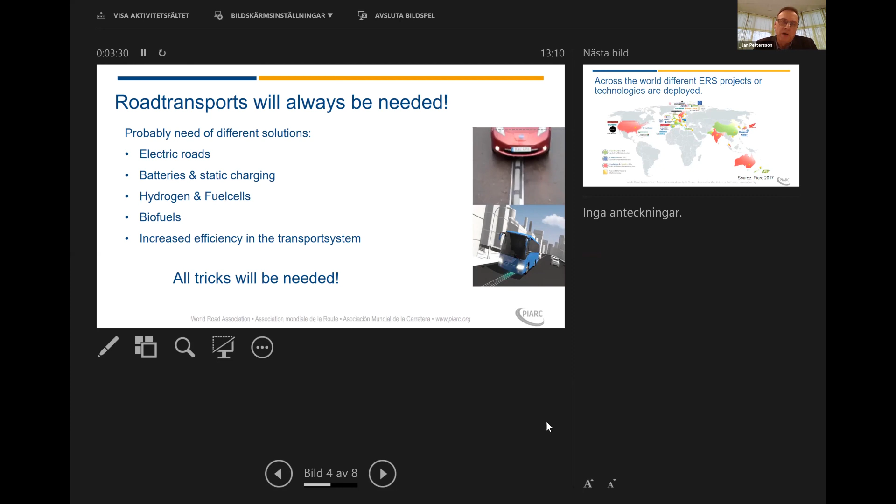We also need to work on increasing the efficiency within the transport system. Can we reduce the transport? Can we reduce the transport of goods? Can we also move goods from the road system to the rail system and to the maritime system and so on? We think all tricks will be needed to reach the goal by 2050, according to the Paris Agreement.

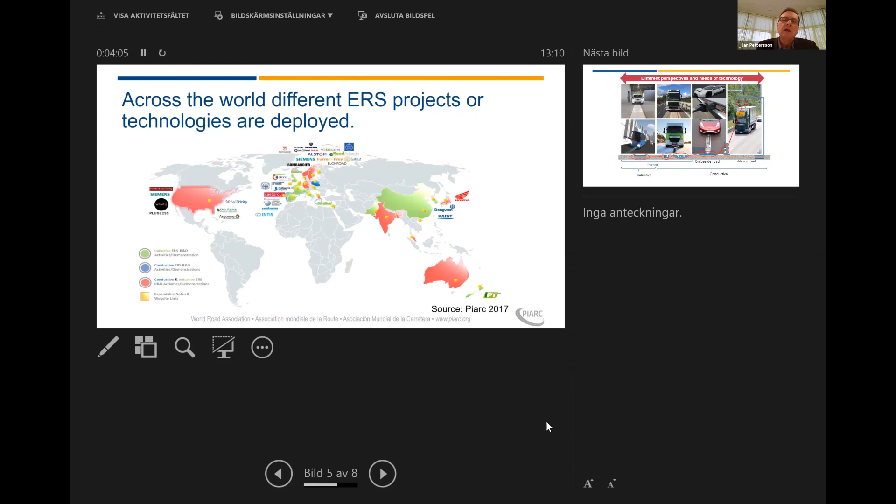So we are here today to talk about electrified road systems, and we know there is a big interest regarding this topic. The webinar today shows that too. This is a map from the previous report that we performed within PIARC from 2017 that shows the countries that are working with ERS road systems. Of course, if we should update this map today, we would probably have a number of more countries with bright colors. As I said, we will hear examples from different kinds of technologies today.

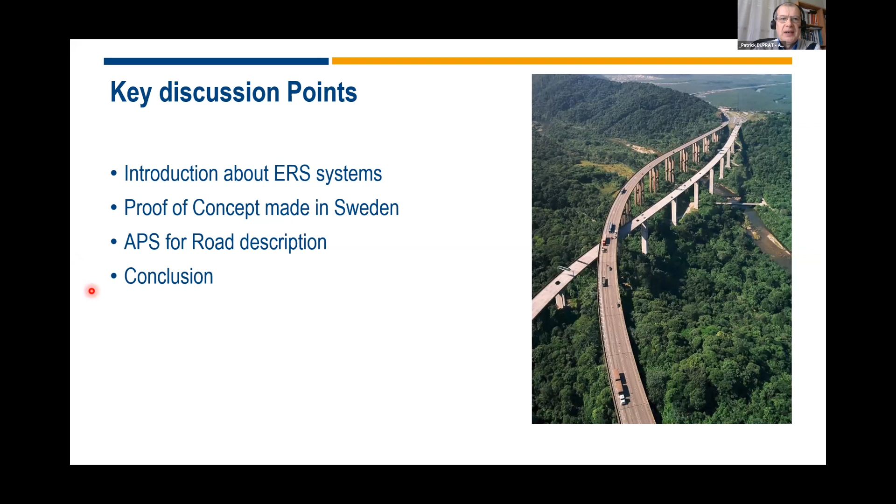So in this presentation, I will first introduce the different ERS solutions. Then I will show you a proof of concept we have done in Sweden. After, I will detail our APS for road solutions we are developing in Alstom, and I will conclude.

So, as Jan said, we have three categories of ERS solutions. The conductive one, via overhead catenary lines, where the current is collected via pantograph located on the roof of the vehicle. The conductive solutions via ground-based power rail, where the current is collected via a pickup installed underneath the vehicles. And the inductive solutions using coils integrated in the roadway, where the power is collected by receiver plates located underneath the vehicle.

If you look at the pros and cons of each group of solutions, the advantages of the catenary system are that it does not impact the roadway, and it provides an efficient power transfer. But it has some cons, like high visual impact, the fact it is usable only by heavy-duty trucks, and it creates obstacles over and alongside the road.

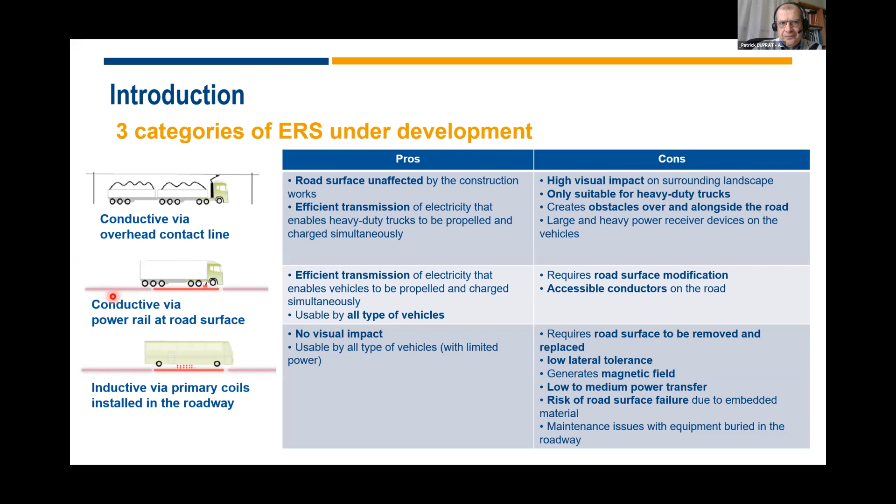In addition, Alstom is a world leader in ground-based power supply systems, with the following solutions under development or already in service, proven, on which we have already demonstrated the safety and efficiency of this type of solution.

We have developed dynamic feeding systems like the APS for tramway, in operation for almost 20 years, with more than 50 million kilometers run with this system. It is this system we are developing now for road applications.

But we are also developing stationary recharging systems, again for tramway. For instance, in Nice, the supercapacitors on the roof of the tramway are recharged at stops in a few seconds, with a power transfer up to 1.2 megawatts. We are also developing the same technology for buses, where we will be able to recharge with a power transfer up to 800 kilowatts.

It is for our experience and capabilities that Volvo Trucks asked us in 2011 to participate in a research and development project on dynamic charging. The objective was to demonstrate the feasibility and efficiency of ground-based conductive power supplies for heavy-duty trucks.

In 2012, we built a test track at Volvo Test Center using our APS technology, and Volvo Trucks developed the onboard parts. All the tests planned on this project have been passed successfully.

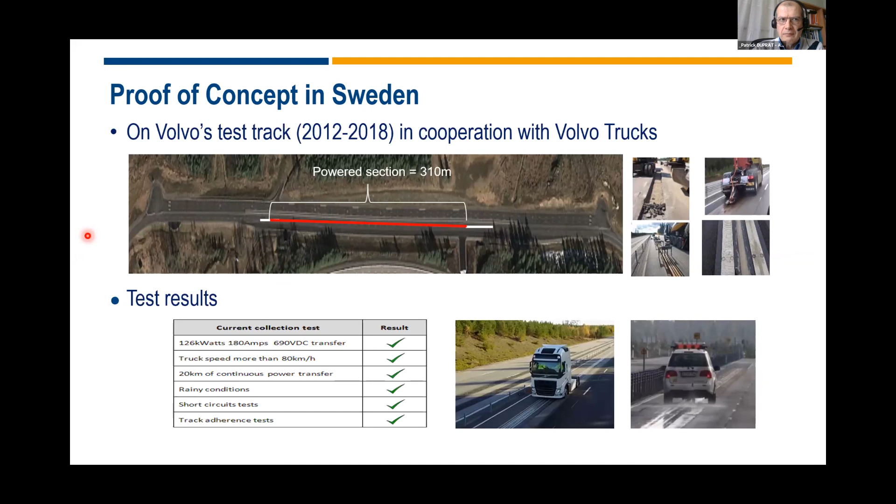On this project, Volvo Trucks also demonstrated the integration feasibility of ERS prototypes at component level on a normal size structure, although it was a hybrid truck with two powertrains.

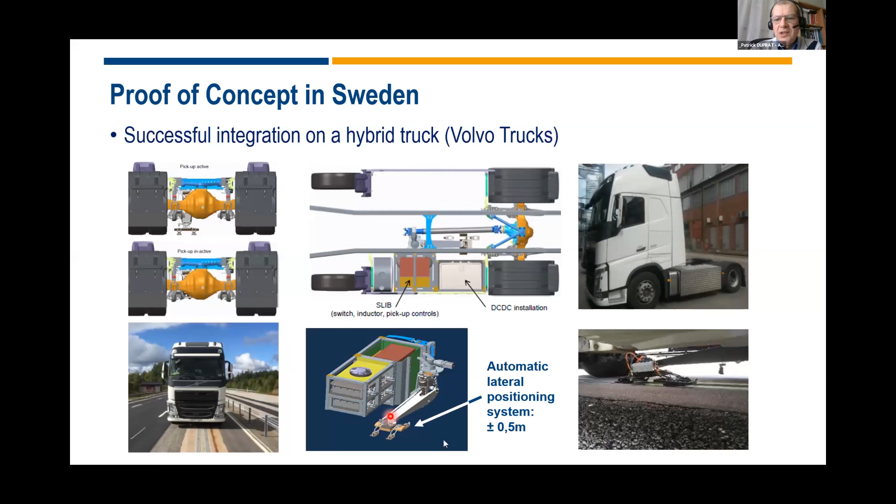You can see the current collector device installed in the middle of the tractor, which was equipped with a lateral positioning system able to move plus or minus half a meter from the center with an accuracy of 1.5 centimeters.

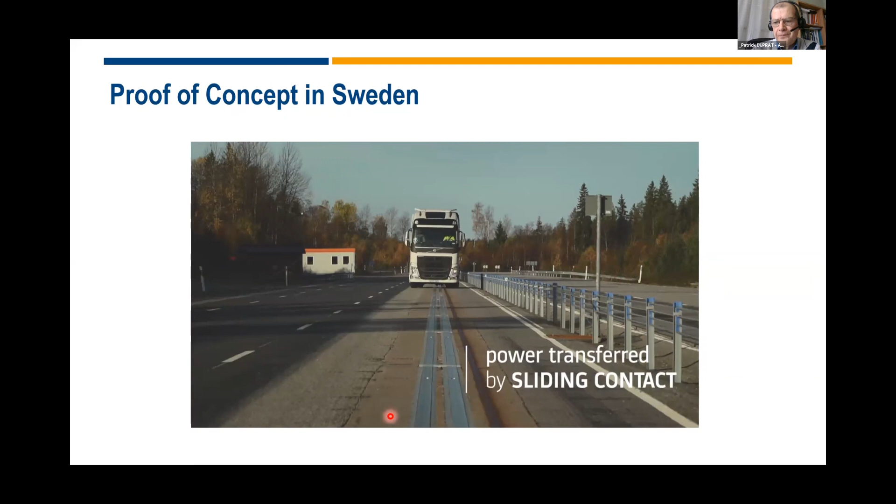Since this proof of concept, we have developed the APS for road system for road applications. New components like the ERS feeding track have been developed to fully answer road needs.

It will be installed in the axis of the slow lane with the conductor segment on the surface. You can see here in red one of the power supply segments. It is energized only when the current collector shoes in operation are arriving on it, and it will be de-energized as soon as the current collector shoes leave it.

As you can see, a part of the power supply segment, 11 meters long, can be energized outside the vehicle. This could be dangerous, even if the probability of having a pedestrian on the highway is very low. So for safety reasons, this segment will be energized only if the vehicle is driving over a minimum speed limit, which we have fixed at this time at 30 kph, and if there is no obstacle in front of the truck. It could be detected either by the driver or by smart sensors installed in the vehicle.

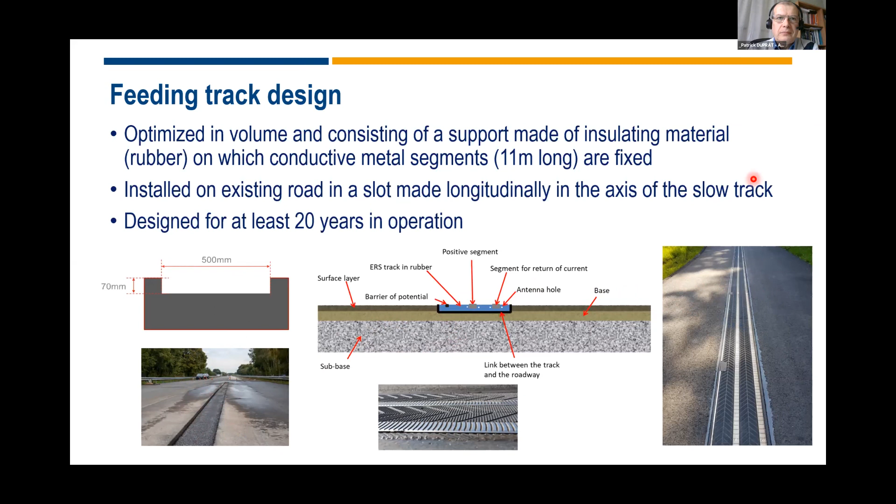Here on the right, you can see a test track made with this solution. The robustness has been demonstrated, and a lot of tests have been carried out to select, then validate, a good solution. All the tests have been carried out by the Université Gustave Eiffel in France, previously called IFSTTAR.

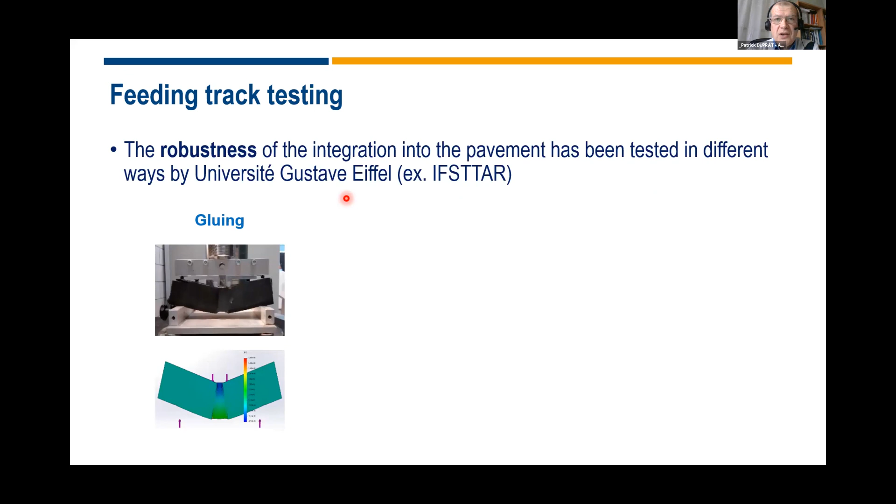With simulation tools, and then tests on small samples, we validated the gluing, the rutting, and the thermal cycling from -20 to 60 degrees. Then we carried out fatigue testing using the FABAC machine, with its wheels loaded at 6.5 tons, which continuously cross an ERS track. The ERS feeding track is now fully validated.

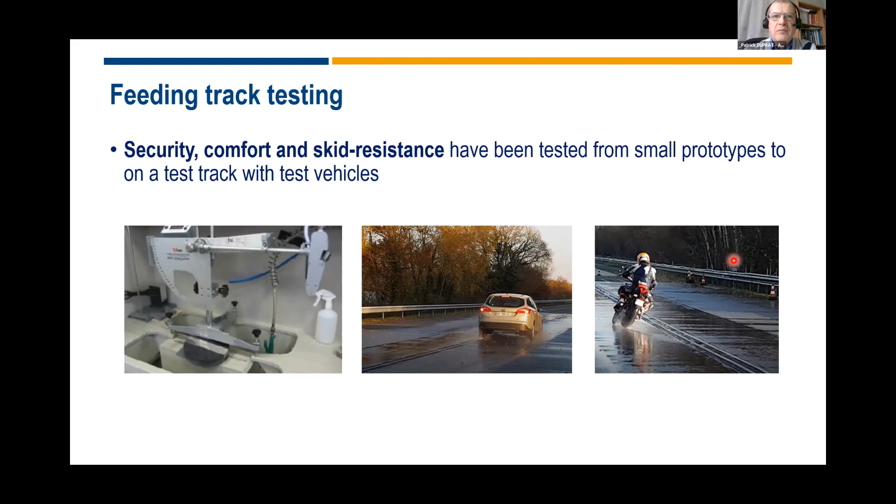We use the same approach for the skid resistance. First simulations and tests on small samples, then real testing on a test track built for this purpose. All the tests have been carried out with different vehicles on the test track. For instance, the motorcycle you see in the right picture crosses the ERS track at speeds up to 180 kph, the maximum reachable on this site. The ERS feeding track we are proposing answers all the security, comfort, and skid resistance requirements for safe use on highways.

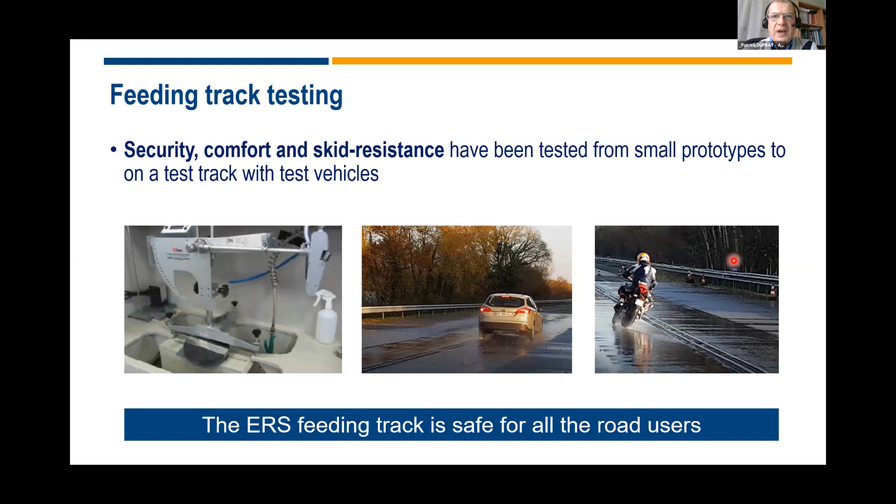In the same way, for winter maintenance, we have built another test track in the Vosges mountains. The objective was to see the effect on the ERS track and the surrounding pavement of freezing, thawing, rain, snow, salt, heat, etc. We also wanted to monitor the effect of winter maintenance with the use of snowplows, as shown in the video on the right.

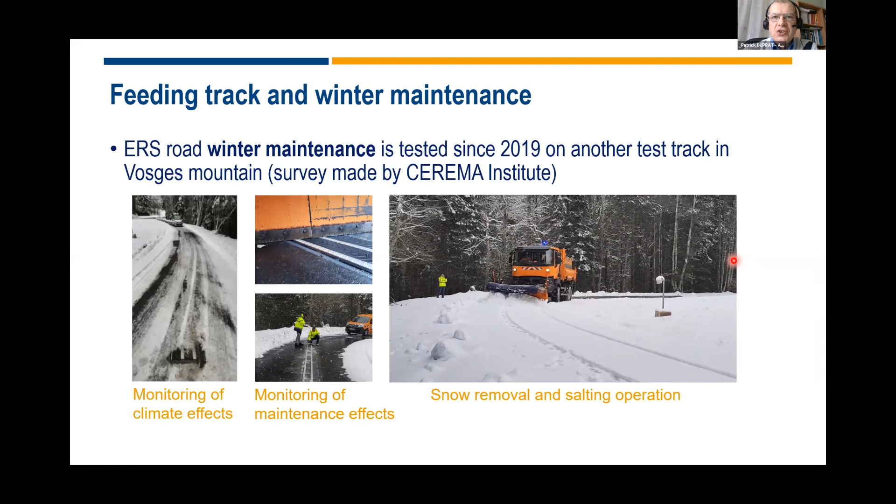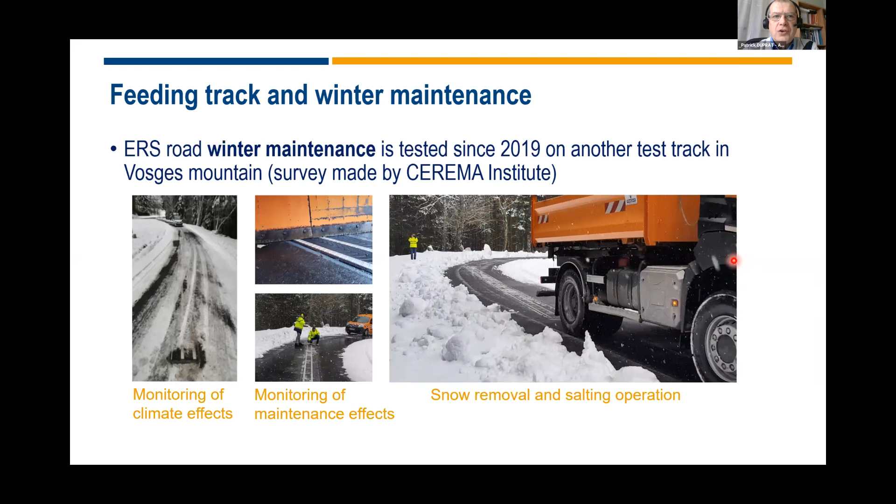Since two winters, the CEREMA Institute has been in charge of monitoring and surveying these activities and has noticed no negative point. In addition, current leakage measurements have been done, showing that the salt and brine spread on the road will not affect the operation of the electric road system. You see here, after the snowplow, the rails are directly accessible, so we can transfer current.

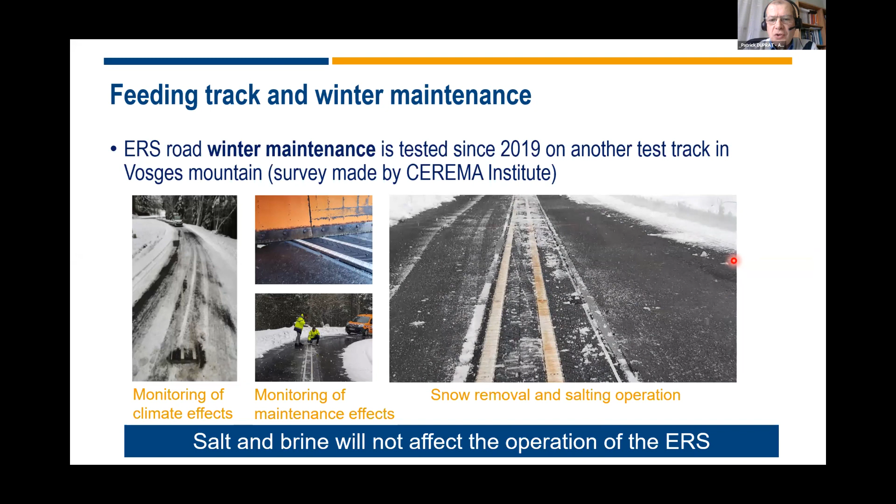Here are now some operating performance data. Our system is now designed for 400 kilowatts of power transfer, even if we can provide much more with this solution. This would be enough versus the need, and it will help optimize the length of road to be equipped. The power transfer efficiency is still 97%. On highway, we plan to operate between 30 and 90 kph. With this technology, we are able to power supply all types of vehicles, from the heaviest one to the lighter, like the car if needed.

In terms of maintenance, for the feeding track, it will be limited to the conductive segments on top being replaced when worn, estimated after 6 million vehicle passages. The power switching boxes are designed with a high level of MTBF, but in case of failure, they can be quickly replaced without any impact on operations. When the road pavement needs to be replaced, it can be done without impact on the ERS feeding track, which stays in place. On the vehicle side, the only mechanical maintenance will be replacement of the collector shoes when worn, estimated every 60,000 kilometers according to our railway experience.

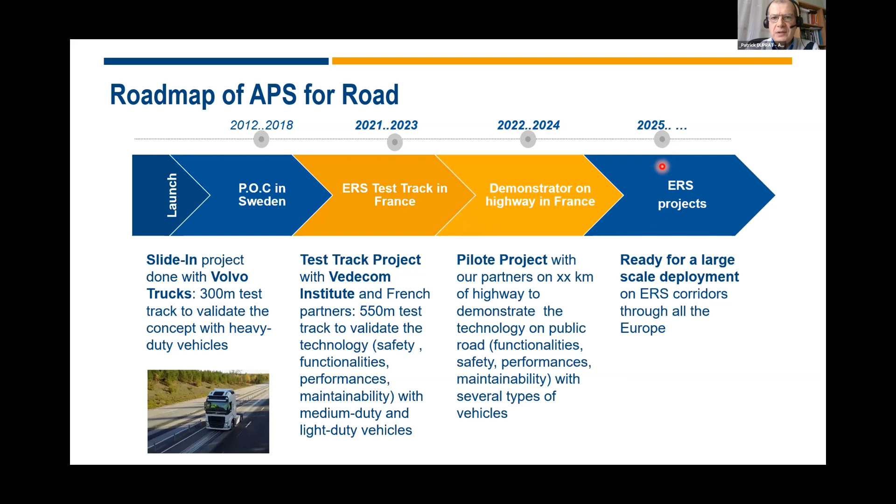In terms of standardization, some actions are ongoing at European level. In CENELEC, in Technical Committee 9X, Working Group 30, we are preparing technical specifications about the current collector device for ground feeding systems. And in October last year, the European Commission issued a new standardization request for ERS systems, including one for dynamic power supply through conductive rails.

To conclude, the APS for road systems, based on service-proven solutions, is the only electric road system providing robust, safe, and efficient power supply on highways for all types of vehicles. This technical solution is the easiest to install and maintain in terms of cost and time. Due to reduced civil works, we will be able to install up to half a kilometer per day without stopping operation on the highway. Combining interoperability with a high level of power transfer, the APS for road solution will offer the most profitable electric road system to decarbonize road transport.

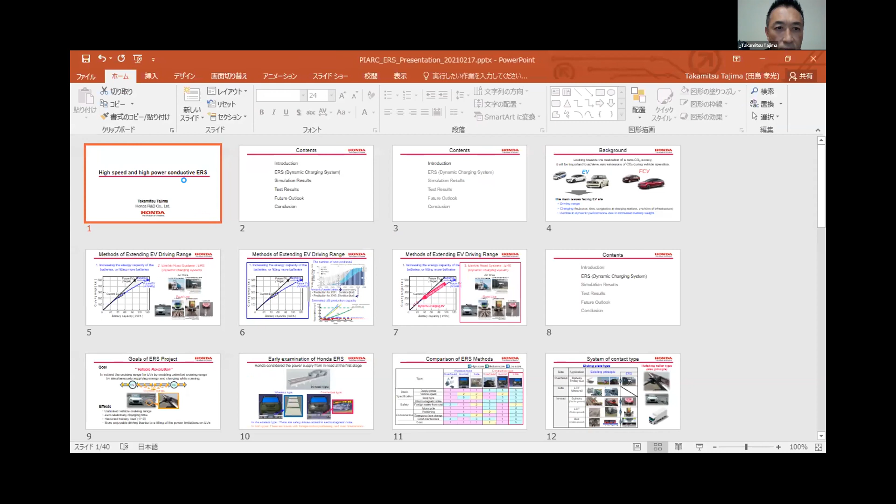Thank you, Alexandra, and thank you very much for inviting me. Hello everyone, I'm Takamitsu Tajima of Honda R&D. My presentation today will concern high-speed and high-power conductive ERS. My presentation will follow the outline shown here. I will begin by discussing the background and aim of our research in order to provide an overview.

Looking first at the background to our research, the achievement of zero emission during vehicle operation will be an important factor in our efforts towards realization of zero CO2 societies. Vehicles that operate using motor power alone and do not use generators employing fossil fuel as a source of energy will be essential to achievement of this goal. We therefore believe that evolution of the EV and the FCV will be a key focus. However, the EV presents a number of serious issues, the main being cruising range, charging, and a decline in dynamic performance due to increased vehicle weight.

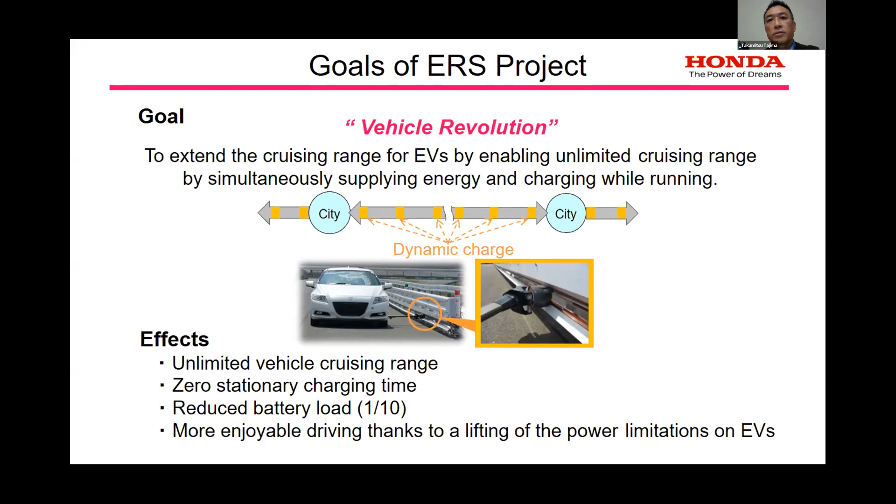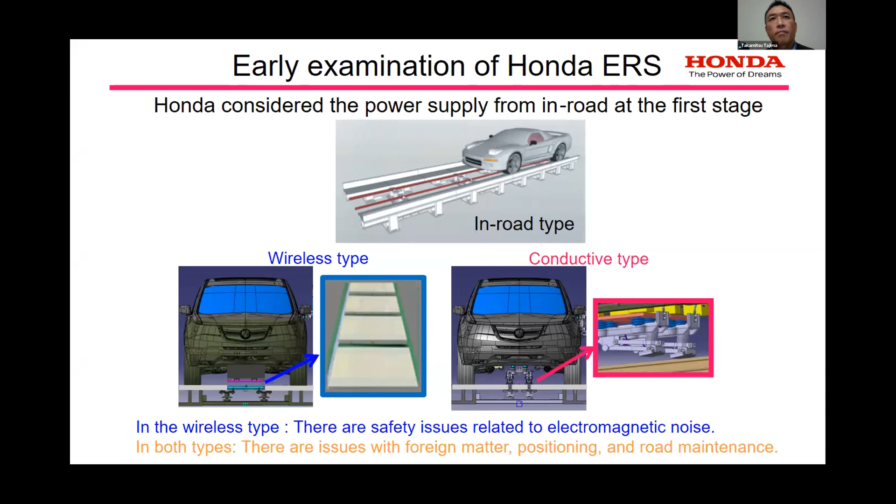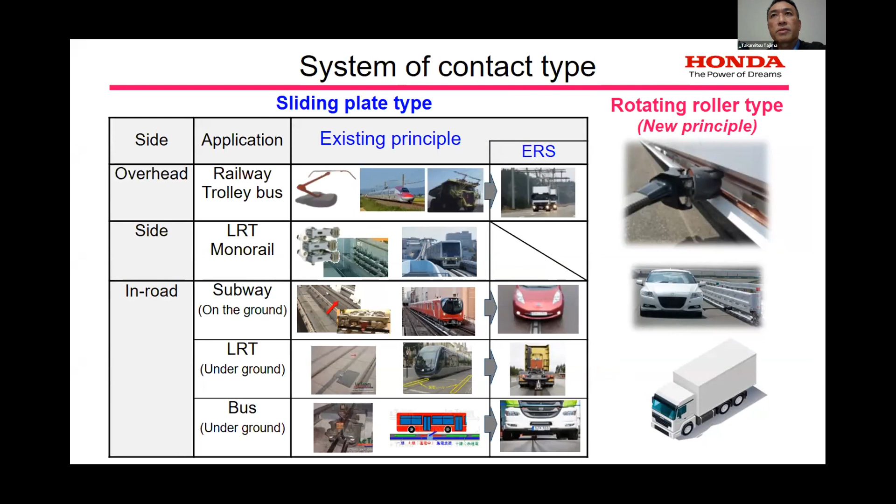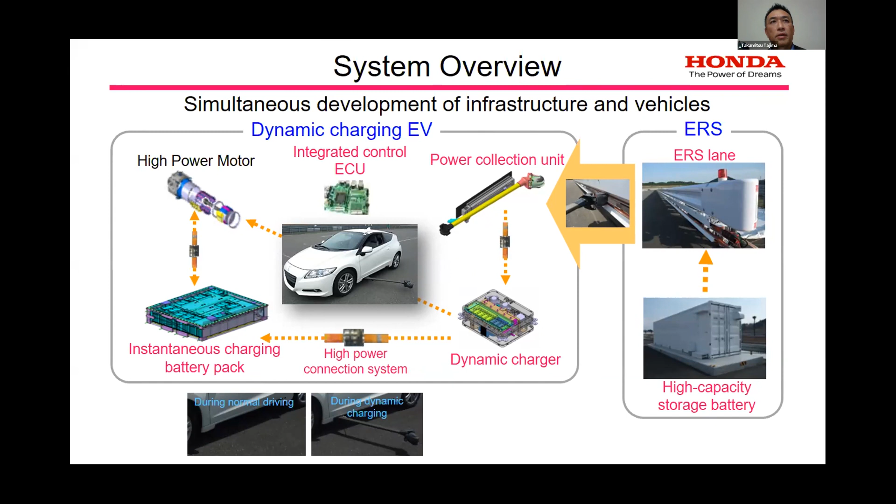Next, I will consider the associated infrastructure. The ERS lane can be created by mounting trolley wires on an existing guardrail. The screen shows a magnified view of positive and negative trolley wires attached to the guardrail in a V-shaped configuration. Protective covers made up of insulators and insulating materials are fitted around the trolley wires.

Simply by pushing from the side against the trolley wires in the V-shaped arrangement, the power collection unit's height is centered and the rollers make the desired contact. We have applied Japanese railway safety standards.

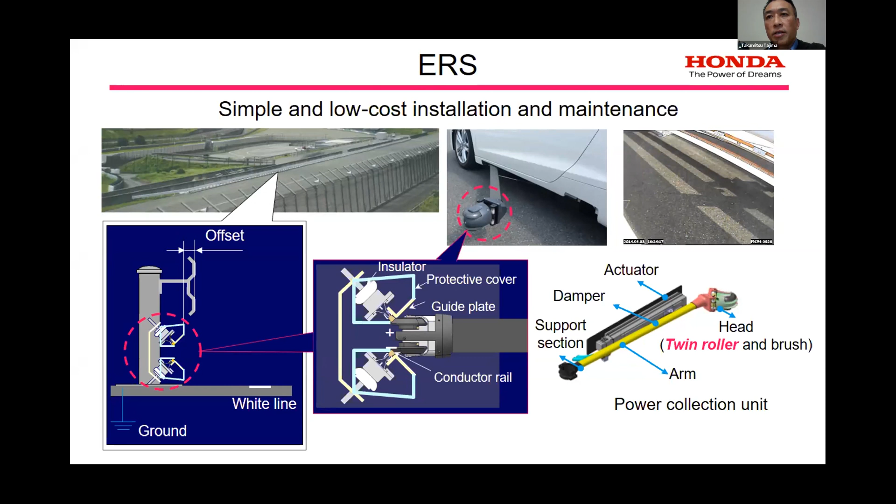Let's look at this system overview in greater detail. The pink section here presents technologies that had not previously existed. DC power is supplied to the ERS lane from the high-capacity storage battery. The ERS lane supplies DC power to the vehicle.

On the vehicle side, the power is collected by the power collection unit and provided to the operating motor and batteries simultaneously by the dynamic charger. Each of these systems is controlled by an integrated control ECU.

Next, I would like to talk about the simulation results. This slide shows an overview of the simulations that were done. One section of expressway in Japan was chosen as a simulation course. The area distance is approximately 100 kilometers, and the difference in elevation is 380 meters.

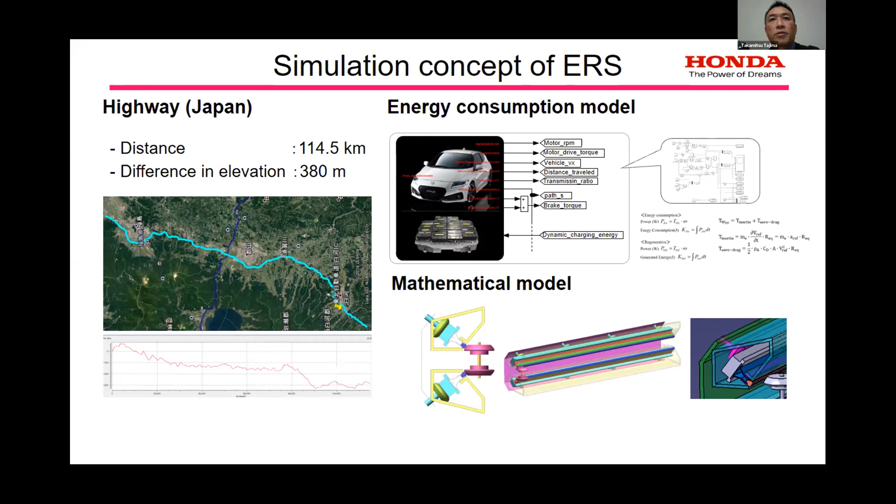This table shows ERS simulation specifications. The simulation conducted here covers the case of passenger cars and heavy-duty trucks driving an expressway and carrying out dynamic charging. The passenger vehicle has a weight of 1.4 tons and cruising speed of 100 kilometers per hour and 200 kilometers per hour. The heavy-duty truck has a weight of 25 tons, a maximum power of 300 kilowatts, and a cruising speed of 80 kilometers per hour. The energy consumption of all auxiliary equipment was also included in the total.

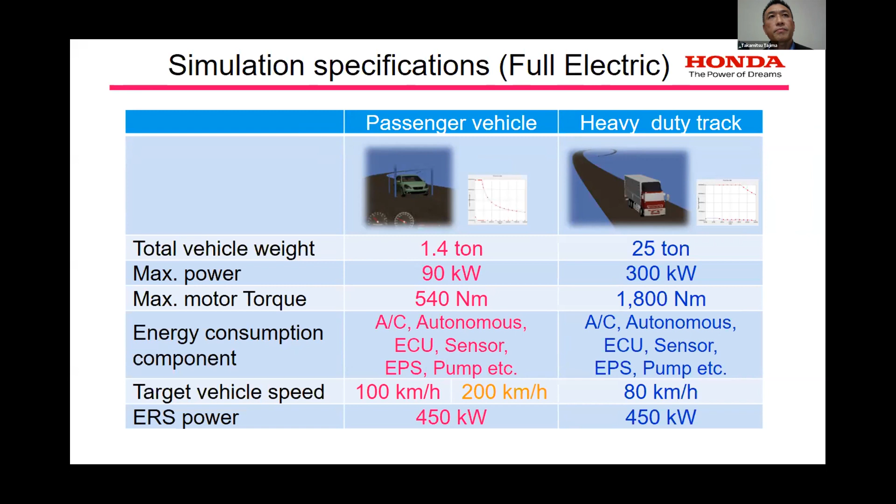Let's look now at the results of tests of the system. To continue, I will look at our prototype vehicles. We created 4 prototype models. Next, I will consider the associated infrastructure. We are carrying out a running test.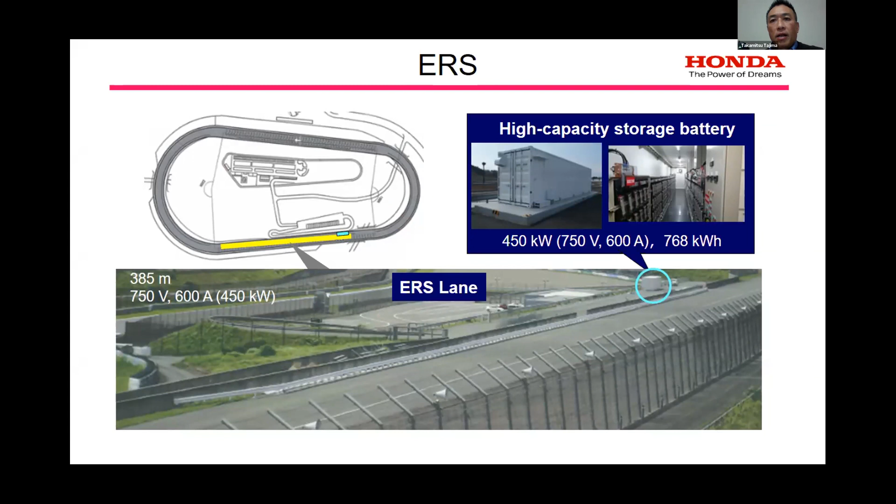Type 1 is charged using a power of 100 kilowatts at a DC voltage of 375 volts and a current of 300 ampere. Power can be supplied to the vehicle at a vehicle speed of 70 kilometers per hour.

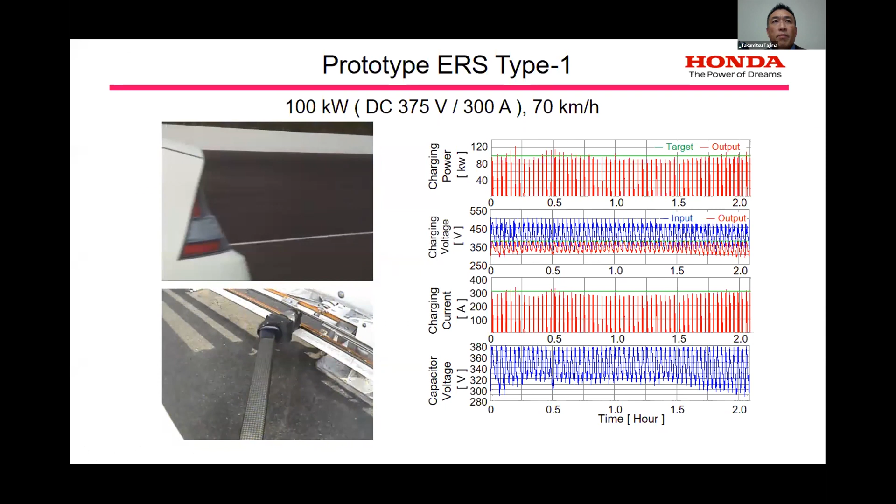The vehicle enters the ERS lane and the power collection unit makes contact with the conductor rails. When this contact is made, the tip of the power collection unit detects the voltage and the ERS begins to function, charging the vehicle.

When charging is complete, the driver is able to freely resume the desired driving pattern. Next, I will talk about the Type 2 prototype.

This is a Type 2 prototype. This vehicle has 300 kilowatts of power, the same as a heavy-duty truck.

Type 2 is able to charge using a power of 180 kilowatts at a DC voltage of 600 volts and a current of 300 ampere at a vehicle speed of 155 kilometers per hour.

By optimizing the contact pressure and the dynamic charger control, we were able to considerably reduce arcing. These results show we are able to considerably suppress the arcing.

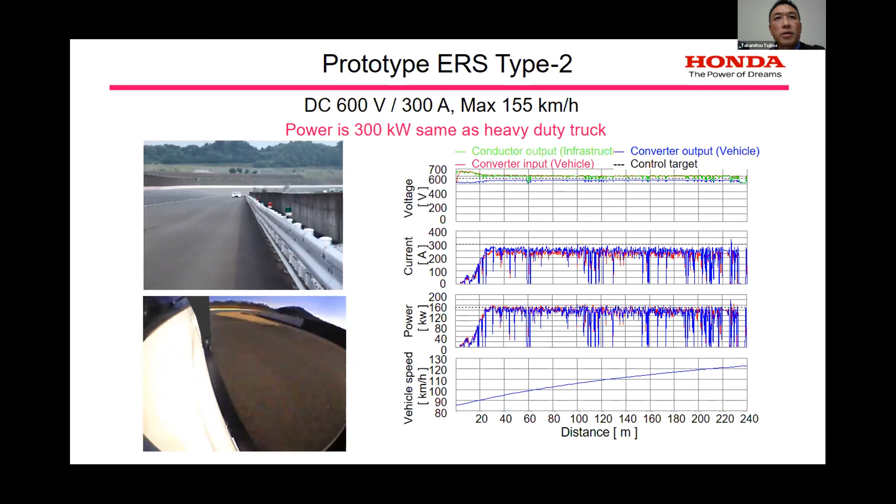Today, however, our Type 3 and Type 4 prototype vehicles will be the main focus. Type 3 and Type 4 are able to charge using a power of 450 kilowatts at a DC voltage of 750 volts and a current of 600 ampere at a vehicle speed of 200 kilometers per hour. The ERS lane is 385 meters long.

The video on the lower is normal. The video on the top is dynamic charging. This way, we are able to drive for unlimited range while using maximum power.

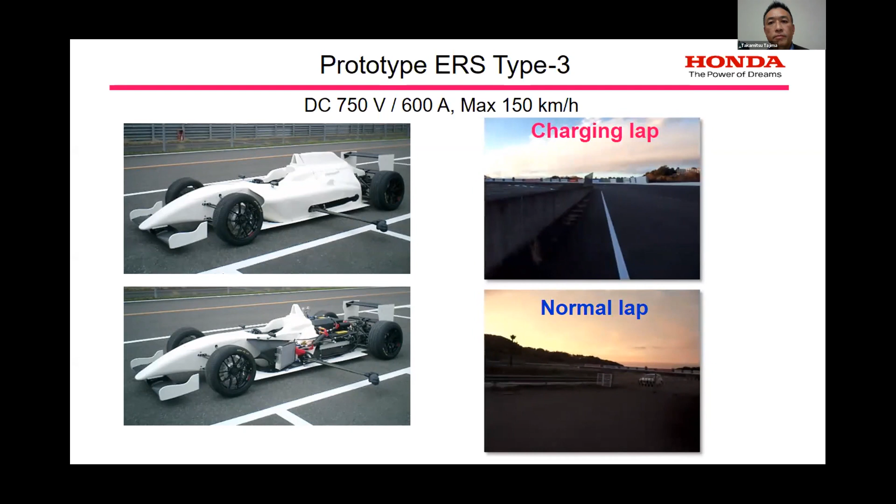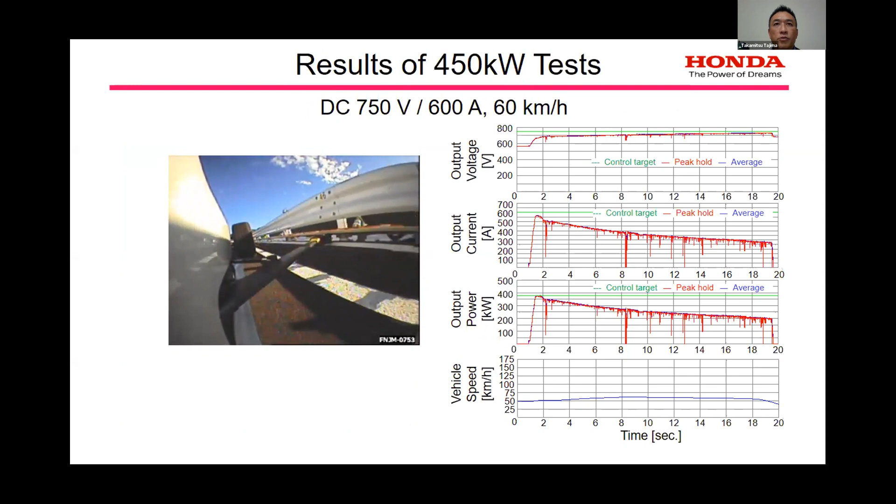Here we see the results of preliminary verification tests conducted at low vehicle speeds. The horizontal axis shows charging time and the vertical axis shows voltage, current, power, and vehicle speed. The results show the vehicle being charged at a speed of 60 kilometers per hour using a power of 450 kilowatts.

Next, the results of a charging test at a speed of 150 kilometers per hour using 450 kilowatts. By optimizing the contact pressure and the dynamic charger control, we are able to considerably reduce arcing as shown here.

The power collection unit extends and retracts approximately 1 meter in the lateral direction, and we have also incorporated the lane keep assist system that we employ in our market vehicles, which detects the white line on the road.

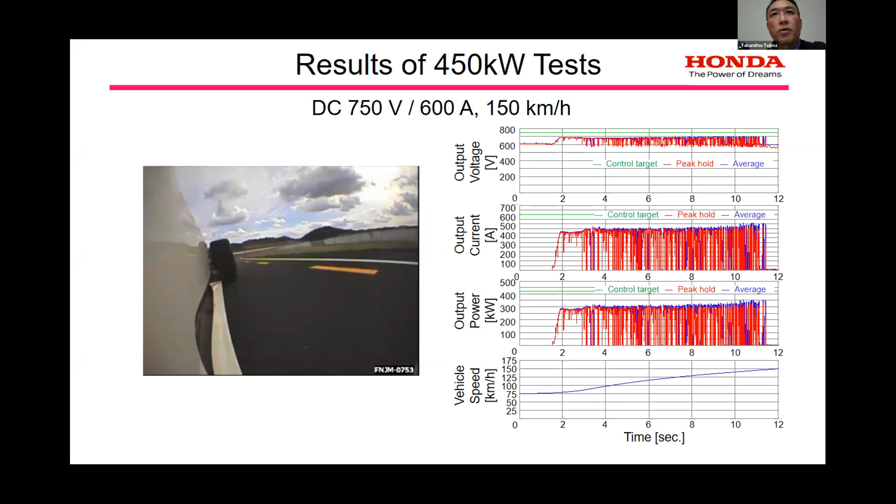I will now discuss the future outlook for this technology. The goal of our research is the promotion of substitution of internal combustion engine vehicles and realization of a carbon-free society by ERS. I'd like to establish the basic technology and aim for real social implementation, to develop and put into practical use this technology for general society.

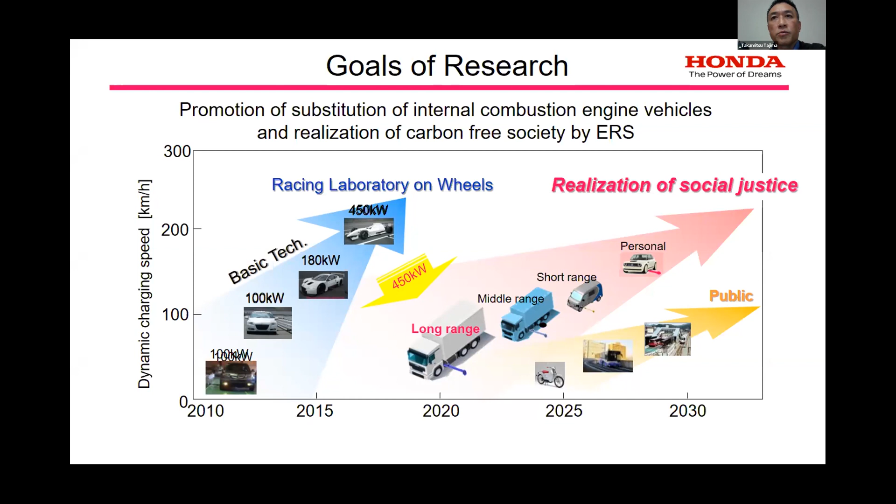Here we see an image of the future of this technology. In the future, high-capacity storage batteries will be charged using renewable energy and will supply this energy to the ERS charging lanes. In addition, multiple vehicles will be able to dynamically charge in the same lane.

This figure shows a Honda ERS car lineup. We will make heavy-duty trucks and very small, super small cars.

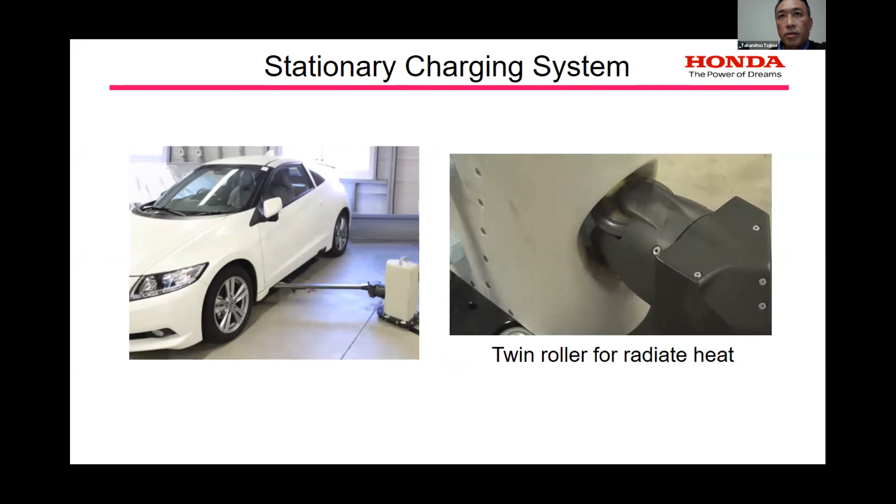That brings me to my conclusion. Allow me to sum up my presentation. Infrastructure and vehicle systems able to realize ultra-high power and high vehicle speed ERS were developed.

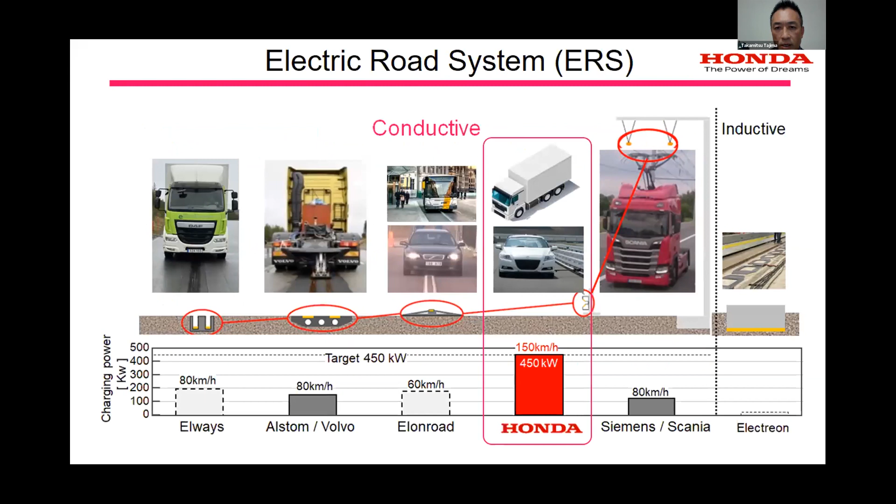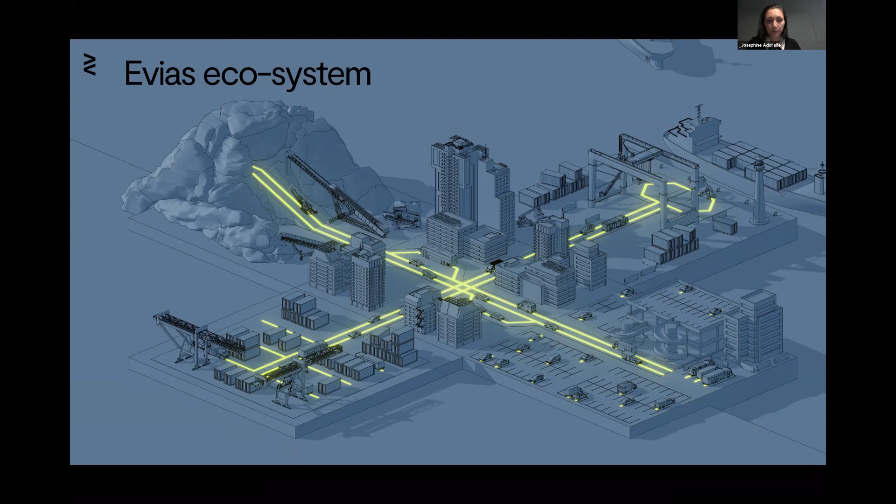Coming to our road charging system, we have a conductive road charging system because it's very cost efficient and gives a cost efficient power supply through the conductive rails. It works for all types of vehicles. This is very important to emphasize, especially when moving over to shared and autonomous vehicles. We can make our system work for heavy trucks and buses to smaller cars, and we can deliver up to 800 kilowatt DC. That's what we're testing right now.

It's possible to charge up to 5 times the number of kilometers driven, which means only 20% of the main roads need to be electrified. This is very good when you're planning infrastructure within a country or society. You can start with the roads that already have power easily available in that specific location. If you already have the grid built up, you can start with that, and then slowly build up.

We can also adapt, so we can go from high, from 800 kilowatt, down to lower kilowatt delivered. It will also be different for different types of vehicles.

Our technology is a safe and proven technology. We started in 2009 already, and we've been doing extensive testing since 2012. We have a test track where we test multiple times a week, and we also have a demonstration road on a public road, a kilometer long, since 2017. So now we're on our third winter. Last year was not that cold in Sweden, but this year has been quite good for testing. We also have a lot of patents and patent families.

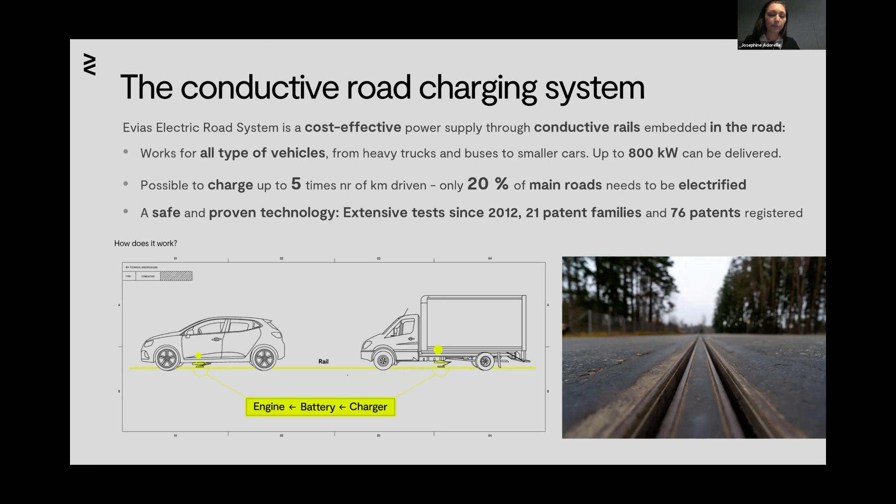Safety is also very important. The rail is very safe itself. We have the conductors deep down in the narrow slot, so you can see I tried to put my fingers down and that didn't work. The upper steel of the rail is grounded, and we have mastic asphalt on top. You can bicycle on it, that's not an issue.

We have sections that are electrified, 50-meter sections electrified at a time. So if you were to find something very thin to put down in the rail at the same time as a truck is entering this 50-meter section, you will be hit by the truck before you can get an electric shock, if you ever manage to get one at all, because we have different safety systems that would turn off the power. The rail is also designed so that the smallest bike, a racing bike, cannot slip down into the track.

And there is no dangerous voltage on the road. We have tried filling it with conductive salt water and measuring it, and that works perfectly fine.

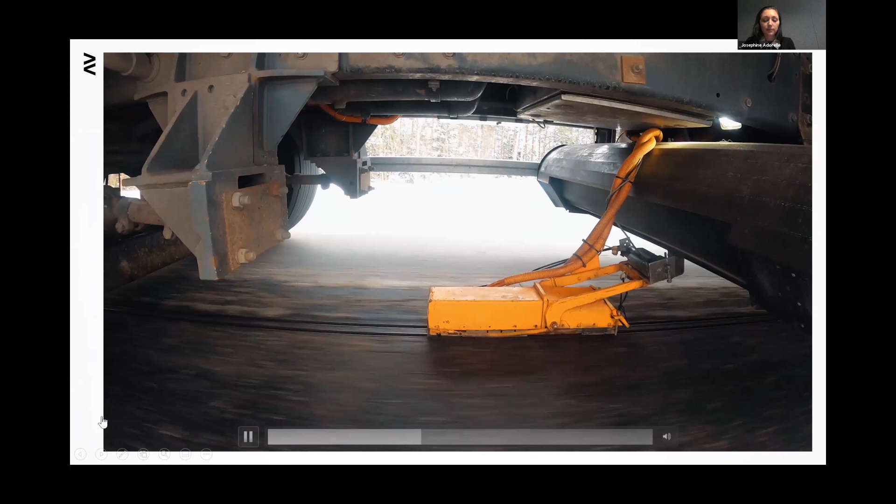So just to show you, this was a couple of days ago. It works perfectly fine also in winter time.

We then take a square out of the road, so to say, with the rail, and that can be used for any type of vehicle as a station-based charging solution. We see that suitable at end stations for buses or a parking area. And the goal is to have that delivered at the same price as a regular fast charging station.

The most important thing for us is that we know we have a technique that has been proven and tested, that has been up and running both in winter time and in warm summers. We actually had a few of them in Sweden, although it's difficult to believe.

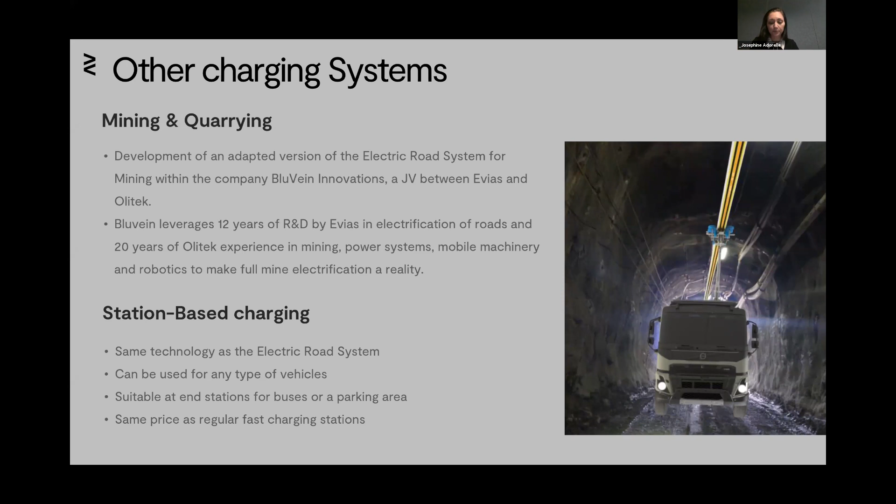And that was it for me. So I was quite quick today. Thank you.

Thank you very much for your presentation. That was indeed very interesting to see how we can use this infrastructure and how we can change our cities to be more convenient for our future.

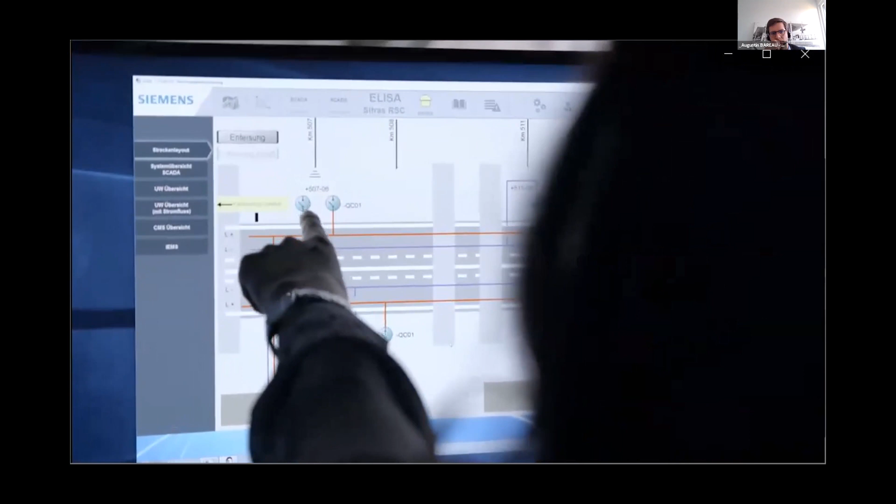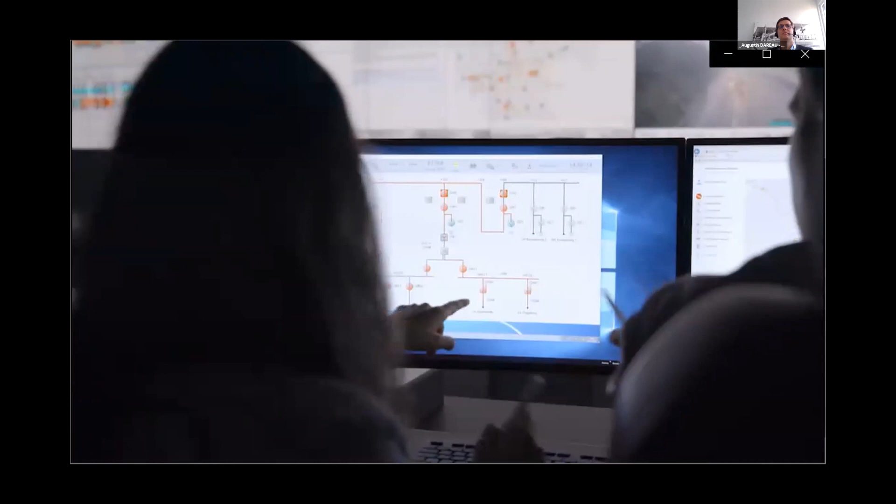Electrification of the highway is an important building block for eco-friendly freight transport and uses 100% renewable energy. Proven technology rethought: the reliable system of supplying power through overhead lines was transferred from the rails to the highway. It combines the efficiency of electrified rail with the flexibility of trucks, leading to a significant reduction in energy consumption without restricting mobility. Trucks can charge their batteries through the overhead lines and therefore also drive fully electric when not on an e-highway. The system is compatible with existing infrastructure, can be combined with alternative fuels, drive systems, and new transport technologies, and makes a quick payback possible for trucking companies.

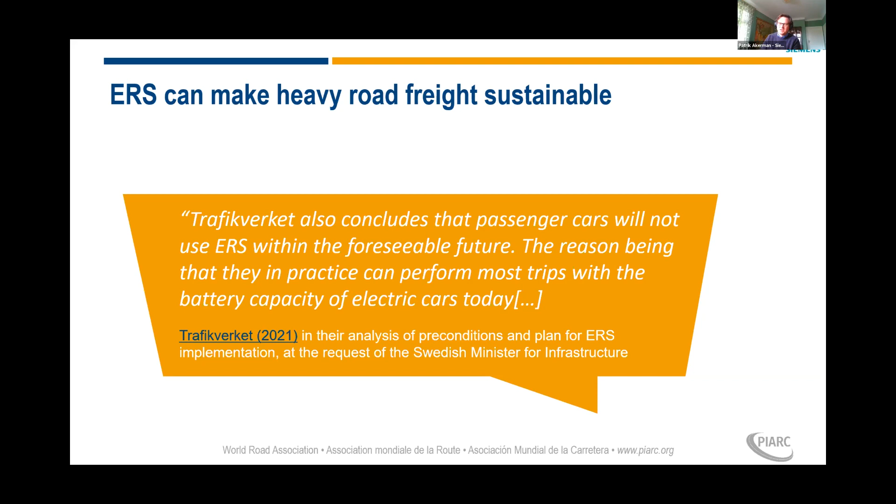So if you go to the next page again, go forward please. Then we see that the vehicle type that really stands out, the fourth bullet point, is long distance trucks. They are still very difficult to decarbonize and are seen as a hard to abate sector. Many people are thinking what could be the solutions here, or what combinations of solutions. As Augustin mentioned, we think there would be a combination of solutions, but there's also clearly a role here for ERS to play. This also explains, at least in Germany, why we not only think there are solutions for cars different from ERS, but also why we think ERS is unlikely to be used by battery electric vehicles.

For instance, if you think about where we'd want to put an ERS, we'd want to put it on those busy highways with lots of traffic, because you want high utilization of any ERS infrastructure. In Germany, that typically means the 3+3 lane highways, and on those highways the right lane is essentially a truck lane. So where you'd build the ERS infrastructure, you have lots of heavy big trucks going 80 kilometers an hour, and many people in cars prefer not to be in that lane. So even if you installed an electric road system, there are very few cars that would want to drive much slower alongside the trucks.

They would prefer to be in the other lanes, and sure, they would need to make a stop every 3 or 4 hours and do a quick charge, but maybe they can combine that with a coffee break, and there's no essential extra cost to them. So we see that there's no need for cars and light vehicles to use other solutions, and they're unlikely to use the electric roads. So the focus really should be on the long distance trucks.

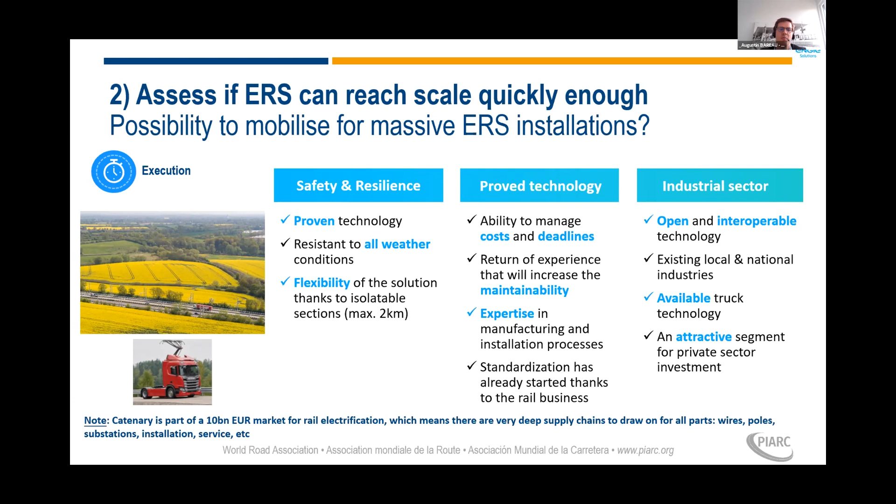The last point is that the industrial sector is ready for this open and interoperable technology. It's important because all major players in the railway industry would be able to go for it, so no customer would be bound to one single supplier. It's also a key and attractive point for this kind of solution. Lastly, the technology for the trucks, the pantograph, is commercially available, so this upgrade on the trucks would also be possible.

From our point of view, there are a lot of studies all over, on an international basis but also in Europe. There are pilot projects, and now we think we need to go for the next step: building the national infrastructure network and thinking about cross-border and regional development. That's important because you need interconnection between different countries to make sure a truck driving from, say, Sweden to Spain would be able to use more or less the same technology.

We can see that some countries like Germany have really moved quite far on this. The Bundesministerium für Verkehr und Digitale Infrastruktur has prepared a document, a deep analysis. I suggest you look at that document to see the conclusions and what they are pushing in terms of technology, and how they managed this study and the technical choices. There's a roadmap clearly defined in Germany around three major technologies: electrical vehicles, fuel cell electrical vehicles, and catenary trucks. They've announced they are reaching out for international partners, and they clearly define a roadmap and milestones to deploy these solutions at large scale, and to ensure an impact on CO2 emissions. It's of interest to see that countries are moving on this.

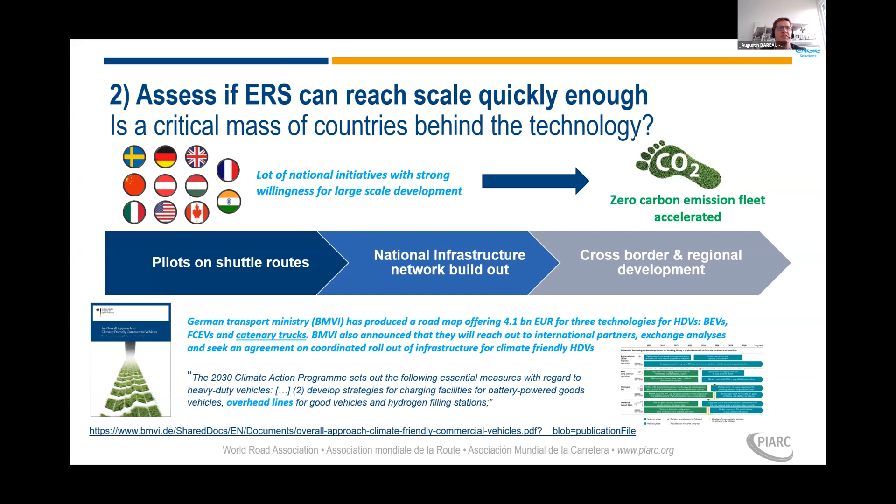Can you go to the next slide? Yeah, thank you very much.

Now we've seen both the technical requirements and how one can easily implement an electric road system, or the preconditions for a large-scale international implementation of ERS. But the third point, which is also crucial for assessing ERS, is: will it attract users? Because without users, it will not realize its economic or CO2 reducing potential.

There it's very helpful that there are lots of studies, some in German, some in other languages, but also a few reports in English looking both at the total TCO, which of course is the very important criteria before building anything, but once it's built, it's also important to look at the marginal cost. We see that because of the very high energy efficiency of electrical solutions, compared to other solutions such as synthetic fuels or hydrogen, there will be very strong incentives to use the system in operation.

Therefore it's very likely you will have a high number of users who will want to use the system, and it's a very clever way to realize the economic or CO2 potential savings of the solution, reaching the goals we've set for ourselves, both in terms of very ambitious carbon reductions by 2030, and eventually reaching zero transport emissions or global emissions by 2050. Not only in Europe, but we want solutions that can spread globally. Therefore it becomes very important that we put money and investment into solutions that have the greatest economic potential, and the strong efficiency advantages of the catenary system is here the most important argument.

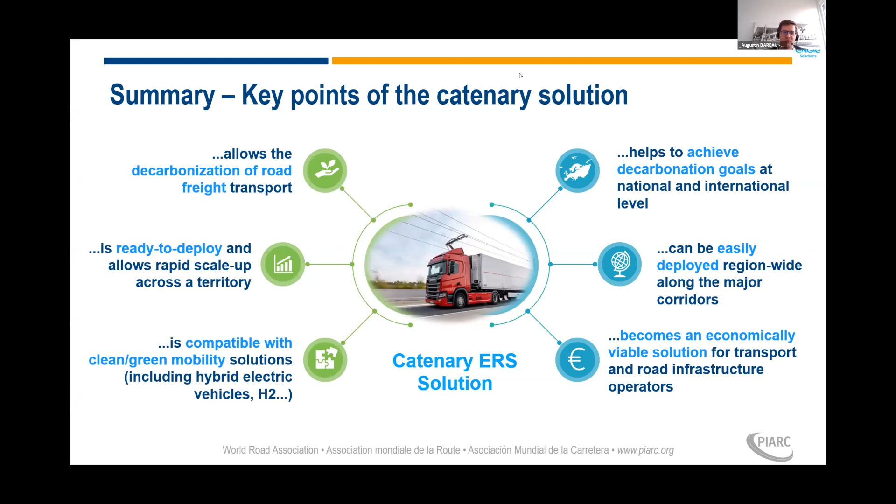And I think you can go to the next slide, and it was - yeah, thank you very much.

Exactly, and thank you, Augustin. It's been a pleasure preparing this together with you. Yeah, thank you, Patrick. Questions and discussions.

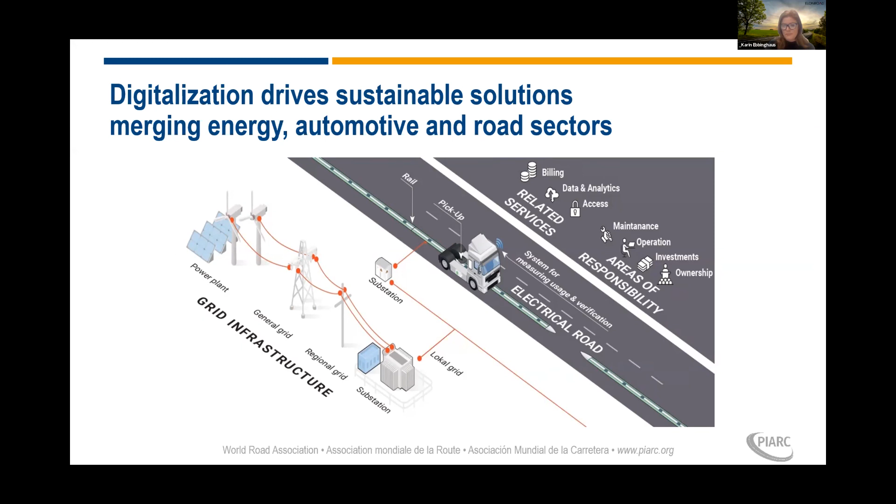Talking about sustainability and being cost efficient, a solution is only truly sustainable if it can also make economical sense. As a company, we're always thinking of how we can build a long-term profitable system that creates value for the relevant stakeholders. If we also consider the climate as a key stakeholder, investing today in order to mitigate the climate impact of transportation going forward, then ERS will be a brilliant solution.

And it works like this: when a vehicle runs over the rail, it will send an encrypted radio signal, which will be detected by the smartness in the rail. If it's an authorized vehicle, the road will recognize it and will unlock the power distribution in very short segments of only 1 meter at a time.

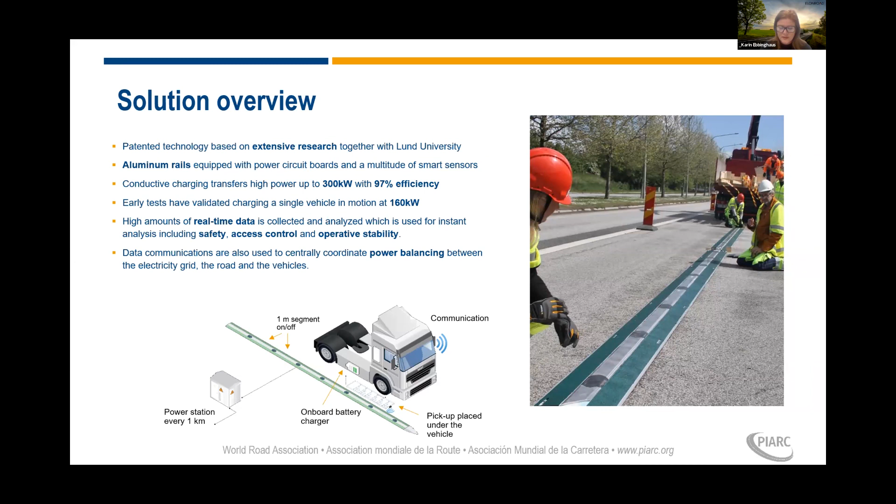We have 2 different versions of our rail. The one you see here is our on-top mounted version that you actually just glue on top of the asphalt. Then we have the same principle, but we submerge it into the asphalt, and then it will be on the same level as the remaining road.

This means it goes really quick to install. We installed this demo project where the first stretch is 400 meters long, and it took us only 5 or 6 hours to do the actual installation. Each rail is 10 meters, so it's a modular system, and you can start with as short as 10 meters, but you can build it as long as you want.

We need to have a power station every kilometer to connect to the grid, but inside the rail, we have power supply in both directions. So even if one 10-meter rail section is not functioning, it will not disturb the power distribution for the remaining part.

We think it's a modular, scalable system that you can use both for highways and in urban areas, since we only power one meter at a time, exactly underneath the vehicle, it will be safe to use in all different kinds of environments.

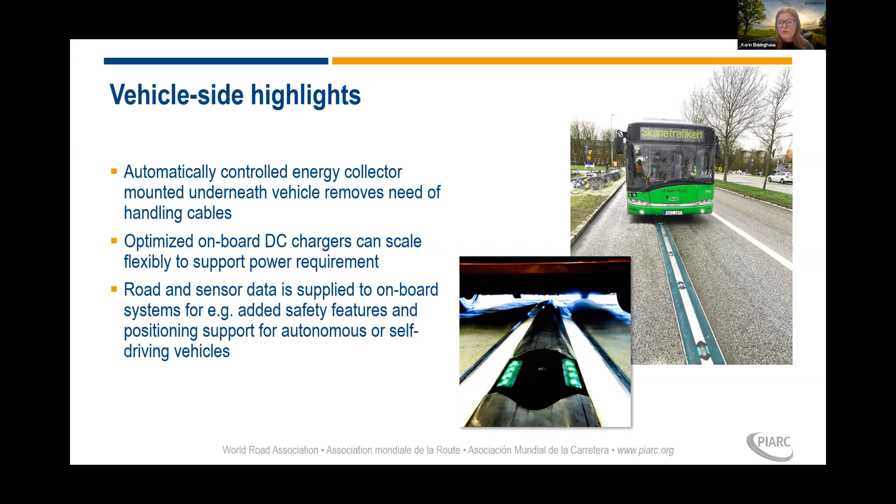From our perspective, it's really a combination of using the rail and the technology on board the vehicles together with the digital solutions that will be increasingly important.

We use real-time monitoring of access control to see if it's an authorized vehicle to charge, and we also know exactly the vehicle identity and the amount of power that has been distributed. So actually, there is a billing system built into the software used in the rail.

Also, at least here in the southern part of Sweden, sometimes there's a shortage of effect. So the system will know the amount of effect available to be distributed to the relevant vehicles using the rail at each relevant time.

If we only have a certain amount of effect, it will be supplied to the vehicles that either need it the most, who have less battery capacity, or actually who have the highest willingness to pay. So it's a very flexible solution that you can adjust.

You can provide power or energy to red light or blue light vehicles that need it, or for example public transportation, if you need it for buses, and then you can reduce it for other uses. So you always have efficient powering of the vehicles that need it the most.

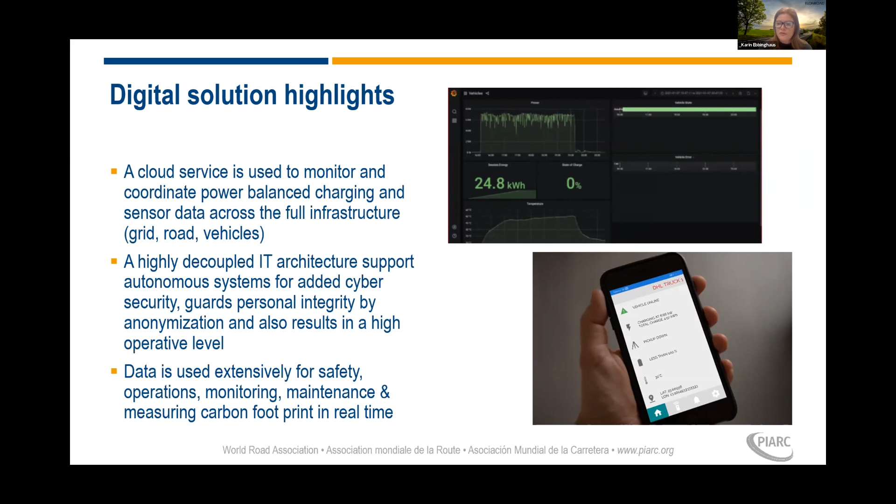As I said, it's a modular platform technology, and we have projects actually together with DHL here in the southern part of Sweden to have a stationary opportunity charging.

They see that if you have a whole terminal full of different electrical vans, it will be convenient to use this system. And actually, I know it's not a scientific based study, but they have two different delivery vans standing beside each other, one with our system and the other van with a cord.

Apparently the driver who uses our system is much happier at work because he doesn't have to use cords every day. So all he has to do is drive over the rail, stop the key, and charging will start.

Then we can, through our software monitoring system, have control over the status of charging at all times. We think the combination of charging when you stand still, perhaps overnight charging, but refilling on the go, or when you stand still delivering goods somewhere, will be the most efficient way to use charging in order to keep your battery levels down.

We think the combination of overnight charging and refilling on the go while delivering goods will be the most efficient way to keep your battery levels down.

We can also see a problem with this whole electrification issue, that even if you can charge stationary overnight, it will put some restraint on different kinds of property owners, because they will have to increase capacity in their buildings, and that is not done without a certain cost.

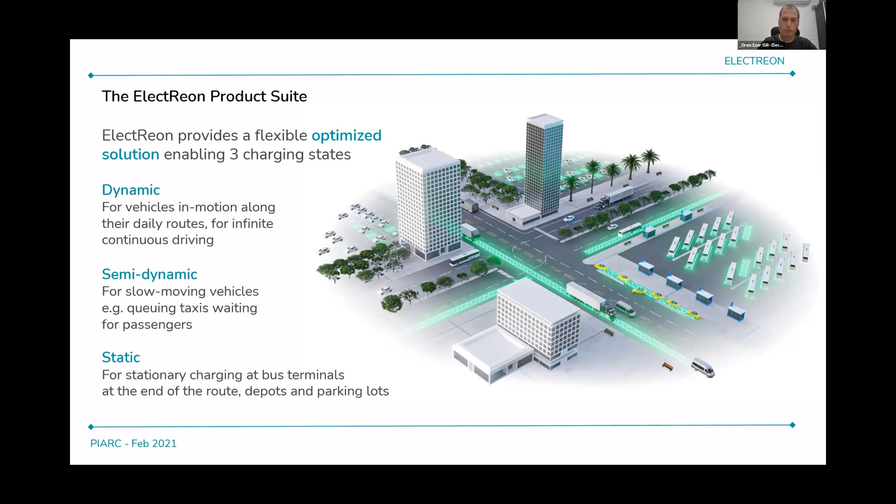2020 was a very challenging year when we deployed 2.3 kilometers of road in both locations, in Israel and in Sweden. It was very challenging, different location, different climate - on one hand we have 40 degrees, and in Sweden we have heavy snow. We deployed over 25 management units, some underground, some above ground, and one static unit.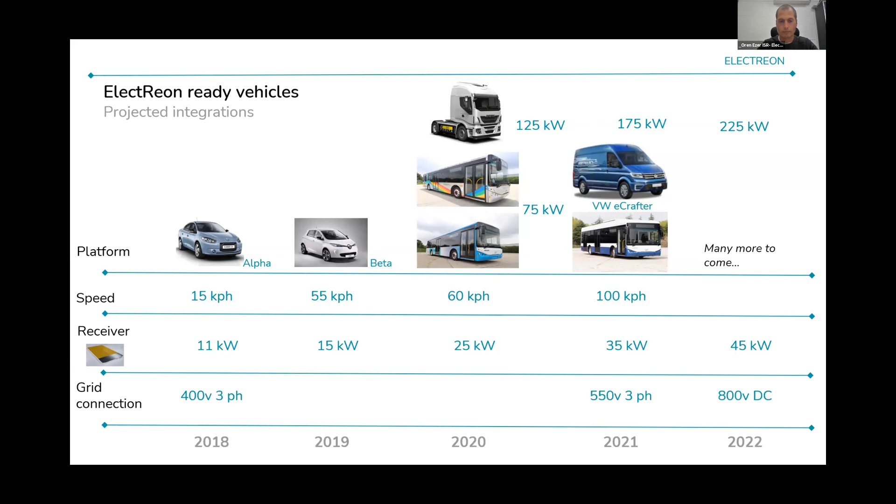There is no limit in speed, as we see in our simulation and even in our road tests. So I would like to share with you some takeaways and insights from our projects in Tel Aviv, Sweden, and very soon in Germany. I will start with the project in Tel Aviv.

The city of Tel Aviv has a plan to electrify all the buses in the city. There are 1,300 buses driving on a daily basis inside the city of Tel Aviv, and it will be a huge benefit to electrify the road in Tel Aviv, reduce those batteries, remove the need to have charging stations at the depot, and open the service 24/7 for the citizens.

This is why we chose to start with public transportation, and this is our bus equipped with a 42 kilowatt-hour supercapacitor. We are going to show that this bus can drive 24/7 with this small supercapacitor.

We chose 2.3 kilometers of road under the university in Tel Aviv, and we paved a bit less than 1 kilometer of road, and this bus will drive 24/7 on this route. There is no need to plug this vehicle into any conductive charging stations.